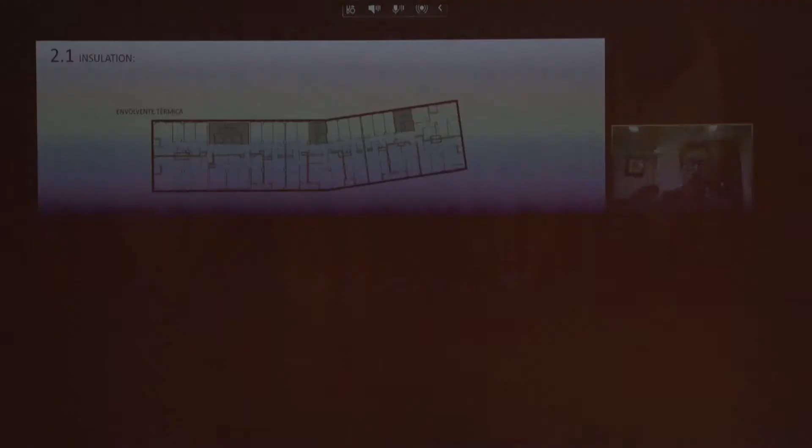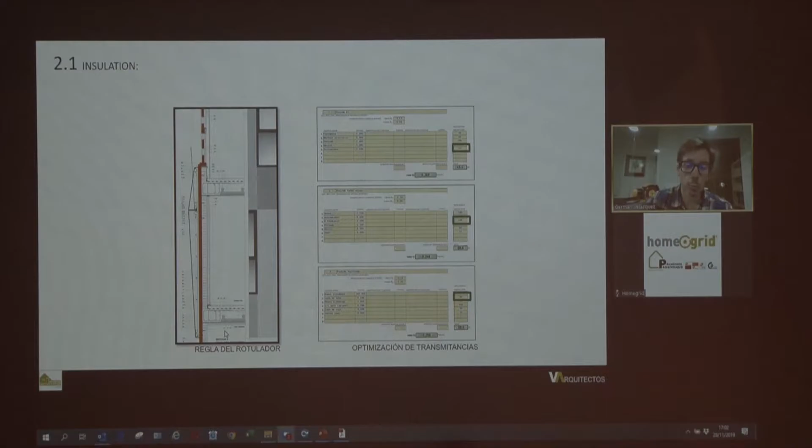The thermal envelope is, of course, outside all of the building. Inside this thermal envelope are non-heated spaces. We have to use lateral thermal continuity so we can have a continuous line of insulation outside the building, in plan, in section, in every part of the building. On the right we can see some of the U-values for this building. These are not crazy values — we're using 0.22, 0.24, not really so low. A big building like this helps a lot, and of course the soft climate in Bilbao is also very important.

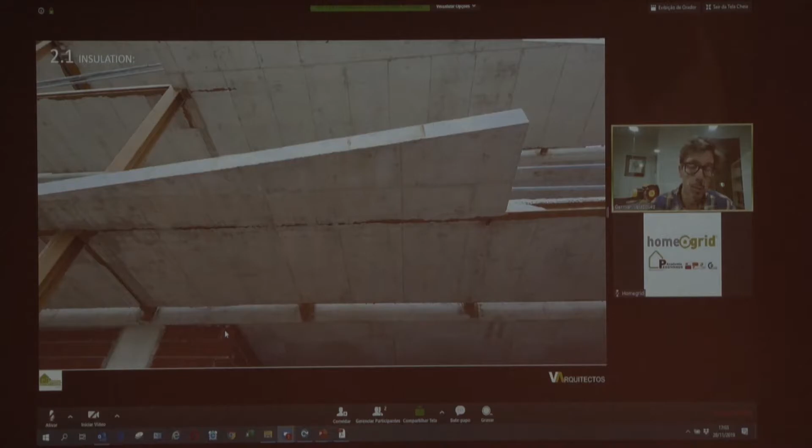Here we can put EPS to solve this thermal bridge. Instead of a linear thermal bridge, we're going to have punctual thermal bridges with a much lower value.

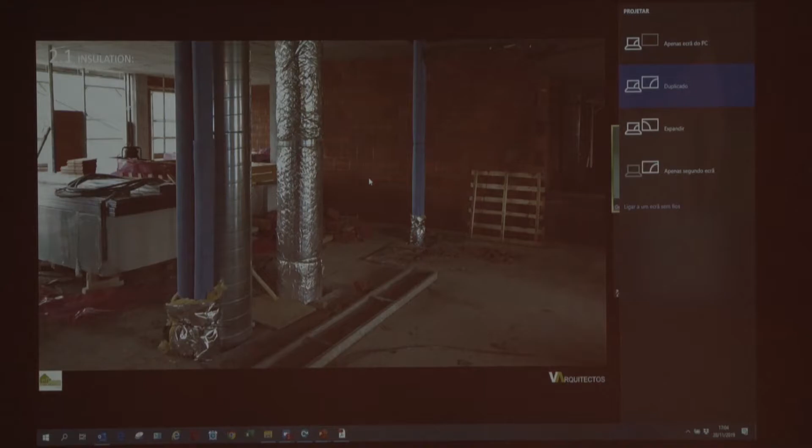Some things that, at least in Spain, we didn't usually insulate — what you see in blue is the acoustic protection for the drainage. We need to insulate these with at least 5 additional centimeters of insulation so we can reduce this thermal bridge. We won't make it disappear, but we'll bring it to a much lower value.

About the thermal bridges — this isn't a very difficult building in this aspect. We've got quite a few thermal bridges, but they repeat 1,000 to 2,000 times, so the most important thing is solving them properly, and after that simply repeating it.

Here we have the cross section of the facade and the roof. Usually in Spain we'd have a brick facade going up at the corner. If we do this, we get a thermal bridge of 0.18 watts, which is quite a high value.

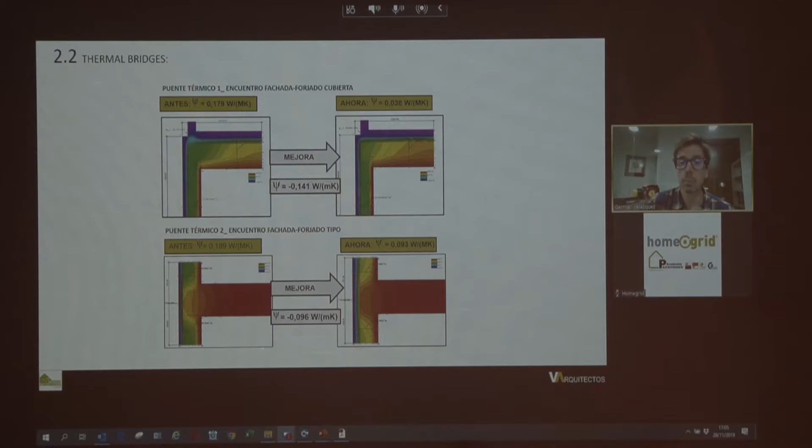If we simply use an aerated concrete block instead, we won't eliminate this thermal bridge, but we can reduce it quite a lot, as you can see in this image. This is a very simple, cheap solution. Maybe builders aren't really in love with this kind of solution because it's a bit tricky working with this material instead of bricks, but it's really an extremely easy and cheap solution.

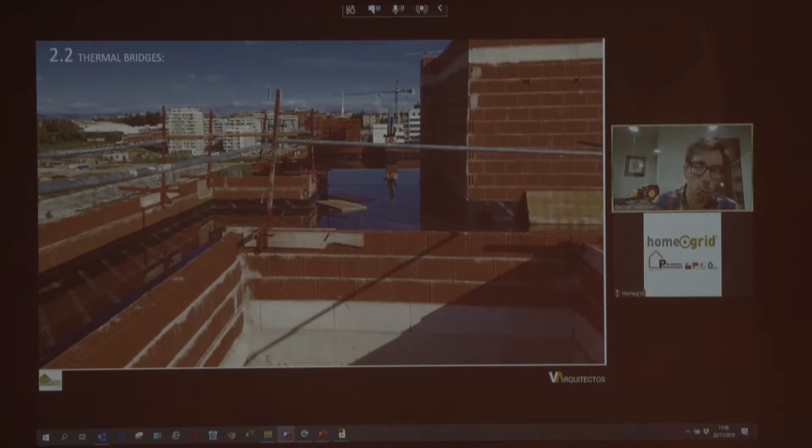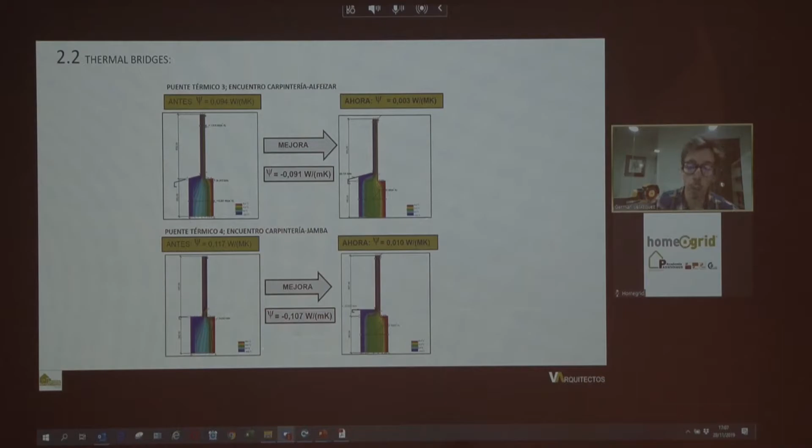So we have to go to the other option. Of course, we have to insulate the frame of the window. We have to get continuity between all the insulation lines. In this case, as you can see from the numbers, this thermal bridge almost disappears. Well, the truth is that it's something that's quite easy.

For making it in the side, especially in this cross section, we can see these little holes that are used for evacuating the water in case of rains and the window is open. So what we used were some special parts made with EPS and some impermeabilization that we used to put between the frame and the outside part of the insulation.

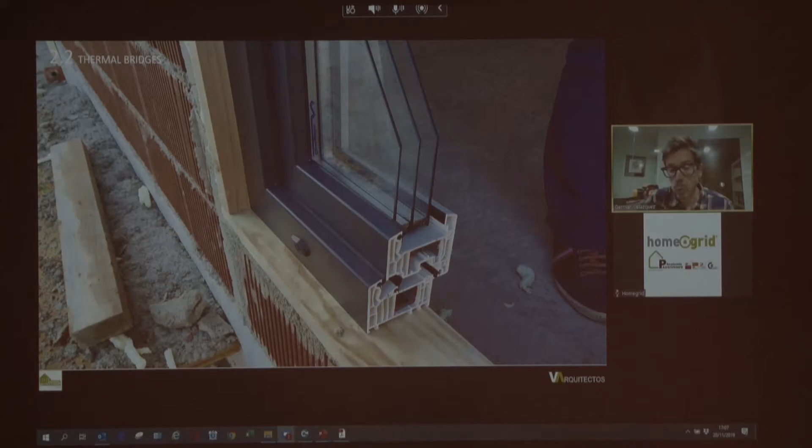With this solution, we are going to achieve a good thermal bridge, and we are not going to have any kind of problems with the water. This is more or less the final look of one of these windows. As you can see, the frame has around 12 or 13 centimeters, and it's going to get just from the outside about 2 centimeters.

About the windows, well, this is such an important thing, and especially some aluminum with double glazing windows with very strong thickness for the glass. And regarding noise, the traffic.

When we went for the passive house option, the window was quite similar, but the U value was half. As you can see here, the annual energy balance, well, it's a huge gap. We are talking about minus 100,000 to 29,000. So, well, we don't have much to say.

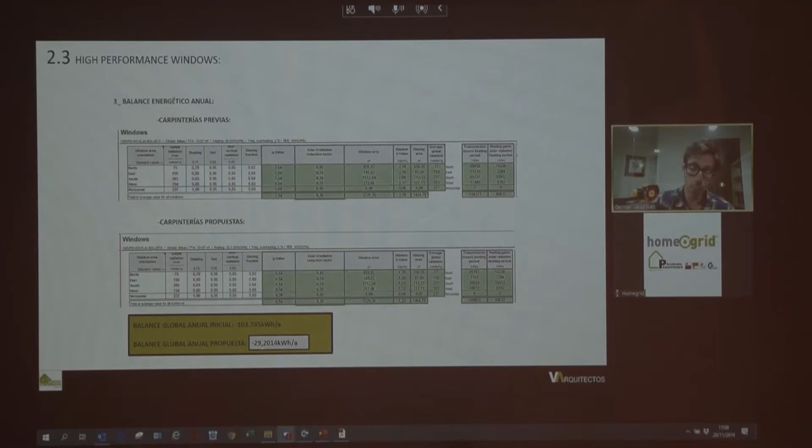Can we make passive house with double glazing? Yeah, of course, but it depends on the location of the climate and of course the orientation. Well, we have many different things to consider. In this case, it was a good investment going to the triple glazing, because if we hadn't, we should have gone to another part for improving the efficiency.

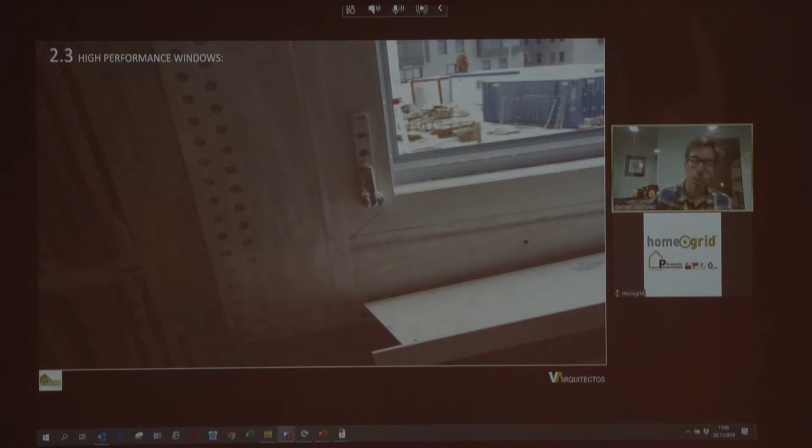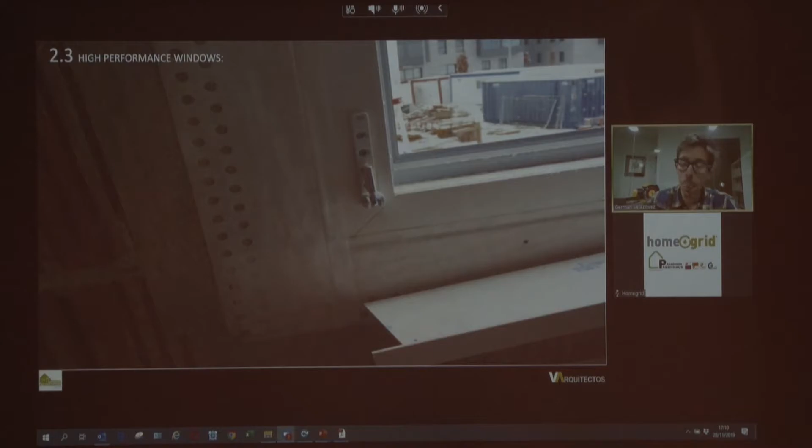Something very important about the windows is the frame, the glazing, the warm edge, but of course also the position, the placement of the windows. We are not going to achieve anything good with a great window if it's not installed properly or without addressing that thermal bridge that we saw before.

We are going to use air tightness bands, different bands for inside, for outside. It's so important using specific material, so we can be sure that we are not going to have interstitial condensation. We must be sure of the SD value, so the water vapor can go through the section without any kind of barrier.

Well, something that we found in the beginning was how are we going to protect the windows. In Spain, and I think it's the same in Portugal, we put the windows much later. Why? Because we don't want them to get worn. So if we have to put them very early, so we can do the air tightness test, the blower door and all these kinds of things, we are going to protect them.

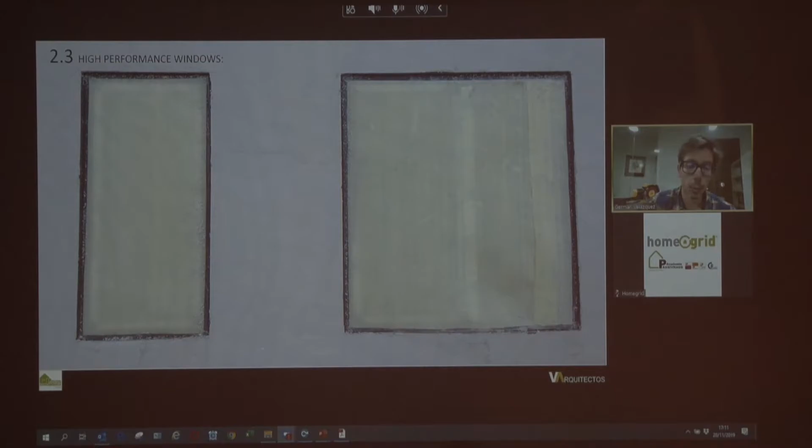Well, this is the first project that we made. Actually, what we are doing is this: put a first line of air tightness bands. After that, we can put the plaster. So we've almost finished the air tightness, with a double band of air tightness over the last one.

Well, this wasn't our first choice. Initially, we were a bit worried about the results of this situation, because the bands were going to be... but the thing is that if the plaster is dry and they put them properly, the results are really good.

Actually, we began in this kind of projects in apartments with values around 2.44, and now we are at values close to 0.2, 0.18. So with traditional construction and this kind of bands, we can achieve really very low air tightness.

Another important thing was protecting the windows from any possible entrance of water. The image on the left shows a traditional option in Spain, a band that wouldn't let water go all over the window. The problem is that it creates a quite significant thermal bridge. We're talking about 2 millimeters of aluminum, with 2 meters for each window. If we have 3,000 windows, this means a thermal bridge with a length of 6 kilometers. This is a huge thermal bridge.

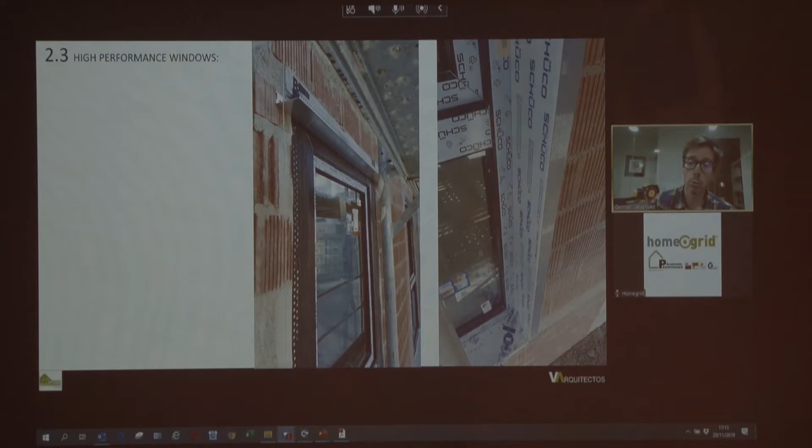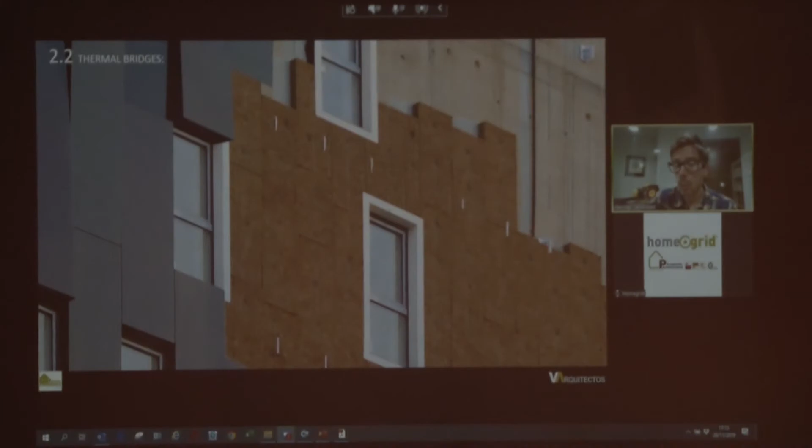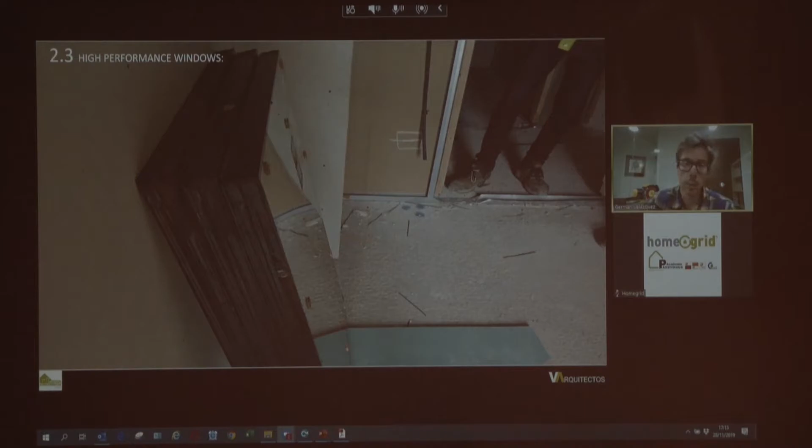The option on the right is a PVC frame that the window builder proposed, and it's really a great solution because it's just 9 millimeters thick, but it has an alveolar composition so it has a quite good U value. With this solution you're not going to have any water inside the window, and the thermal bridge is almost non-existent. The thickness of the windows is huge - these glazings are close to 52, 53 millimeters.

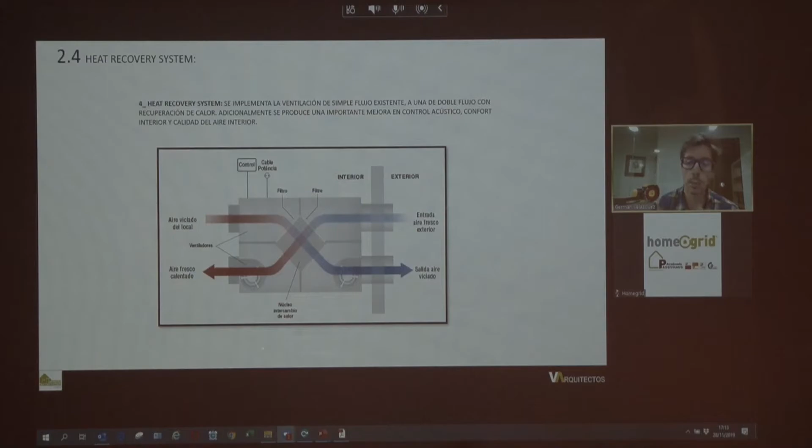After doing all these things, we have to work on the airtightness and the heat recovery system. We have many options, but what we're proposing in all these cases is individual heat recovery systems. Why? Because we need different situations for all these apartments.

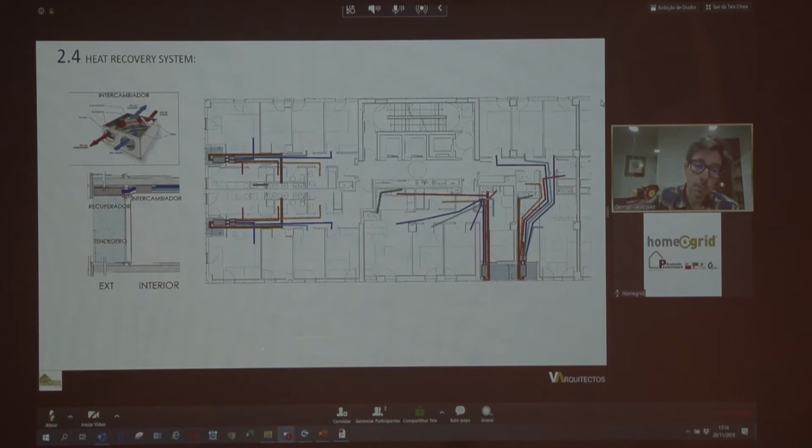It could happen because of this geometry, and this house should need a bypass and free cooling during the night, giving independence to all the users. Since we're also making the airtightness for each apartment, it seems quite logical this way. As you can see, we have the heat recovery systems outside in the balconies.

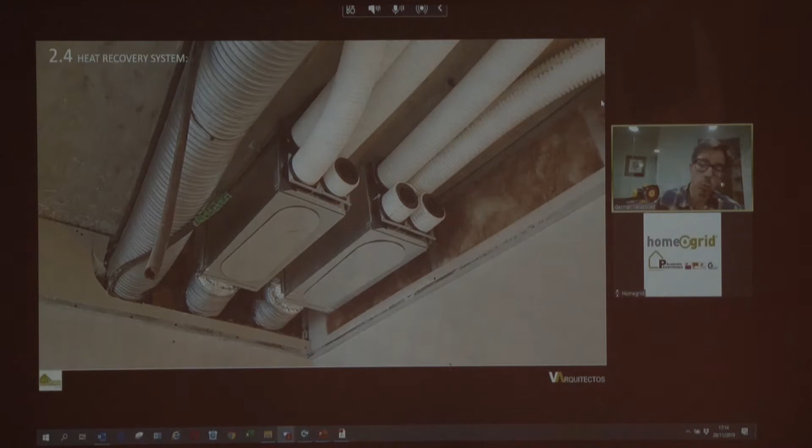After that, we've got all the tubes that go for the impulsion and extraction. It's a quite simple installation. And finally we are seeing that doing things with a bit of care gets extremely good results.

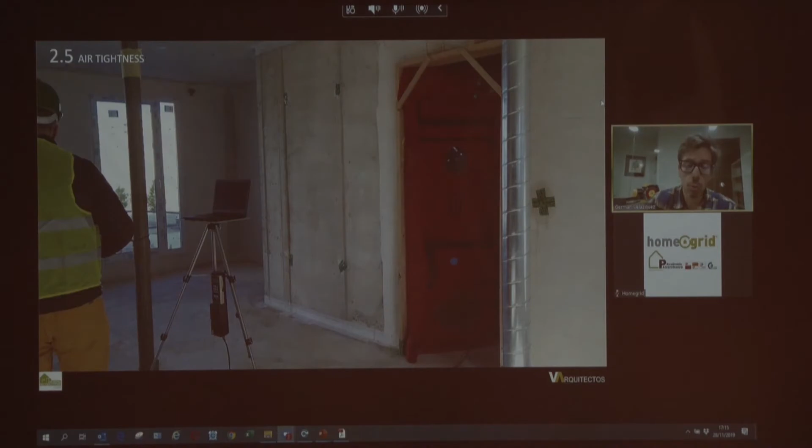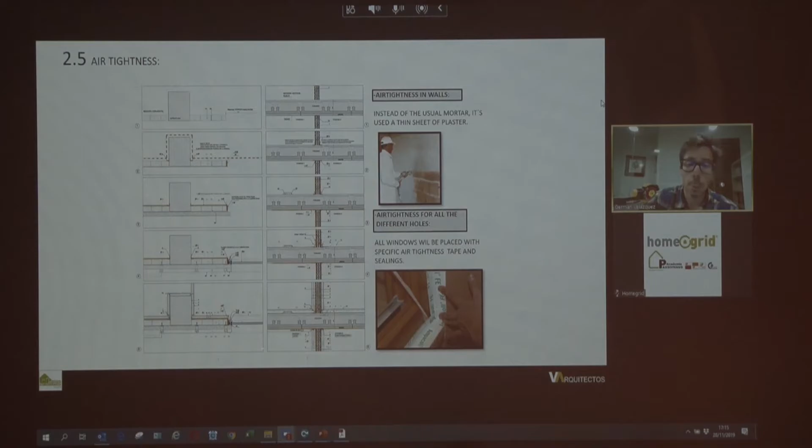We made lots of different drawings for the different phases that we thought were going to be important for the building. Actually, all these drawings are old - they could be 5, 6 years old - but our solutions now are much simpler, much easier to make on site, and of course cheaper.

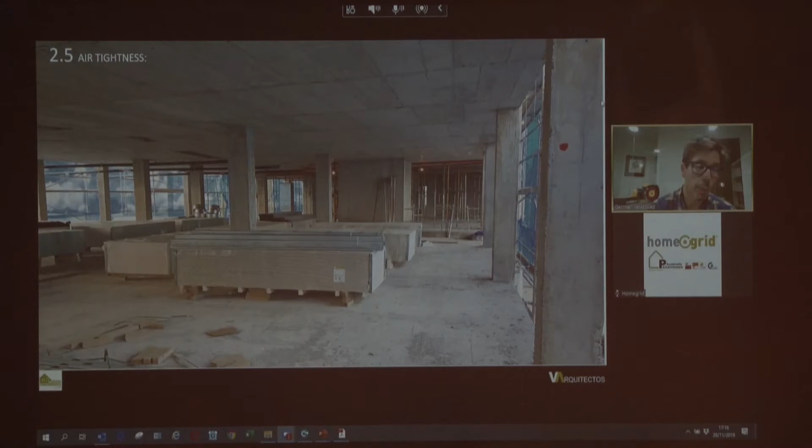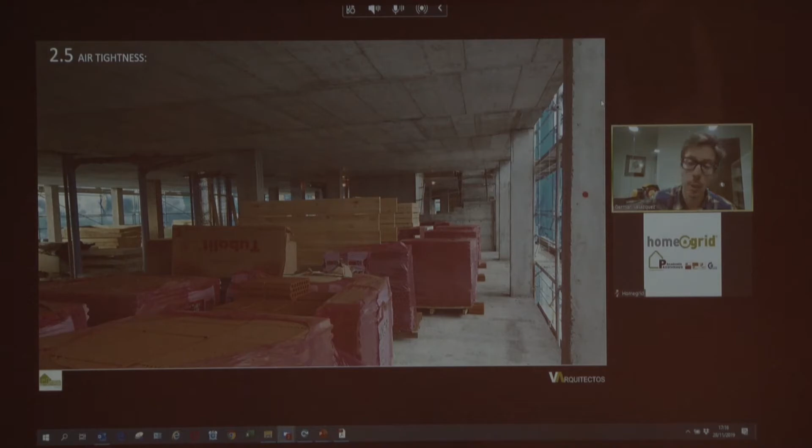Another important thing is that we are building passive house in the typical way we were building before. I mean, we are using concrete, plasterboards, brick, wood. We are not using specific or strange materials - we are using the same materials that we would use if it was not passive house, apart from the specific things like the heat recovery system or the airtightness stuff.

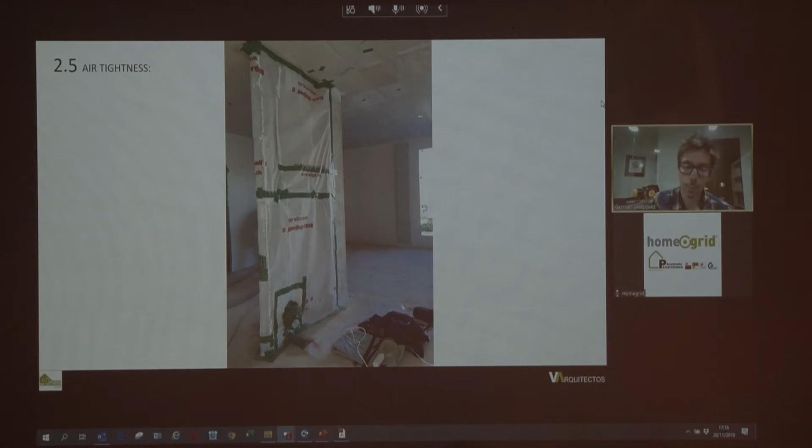Well, don't laugh please - this was one of our first trials for one service riser. The guy who worked here spent close to 1 day putting all this stuff, all these bands. It was really a huge amount of work, and the result was not really good. It worked - we achieved being below 0.6 - but it was really very hard work and didn't seem a very durable solution. So we went to continue the brick inside the apartment.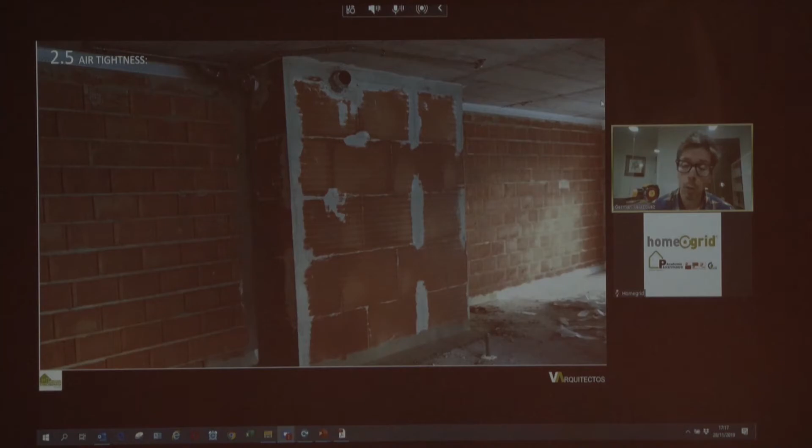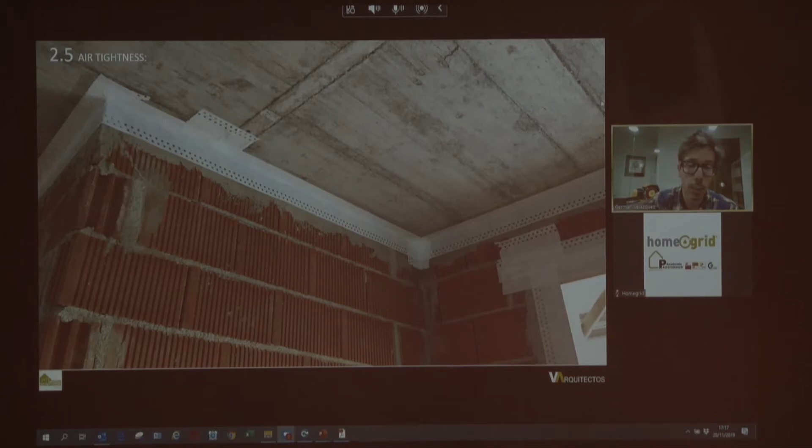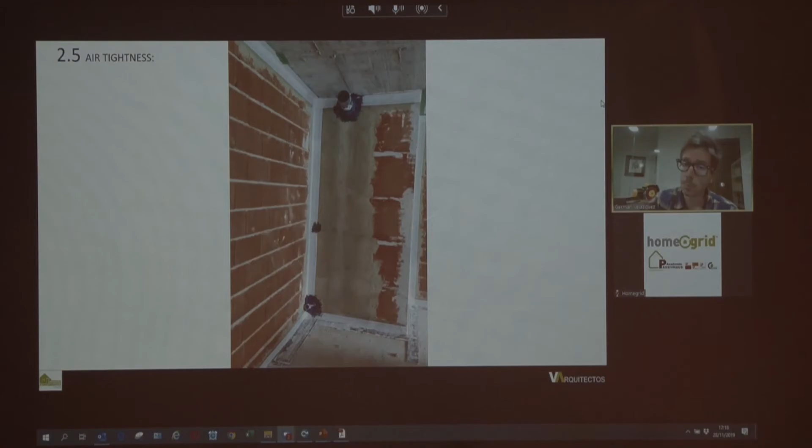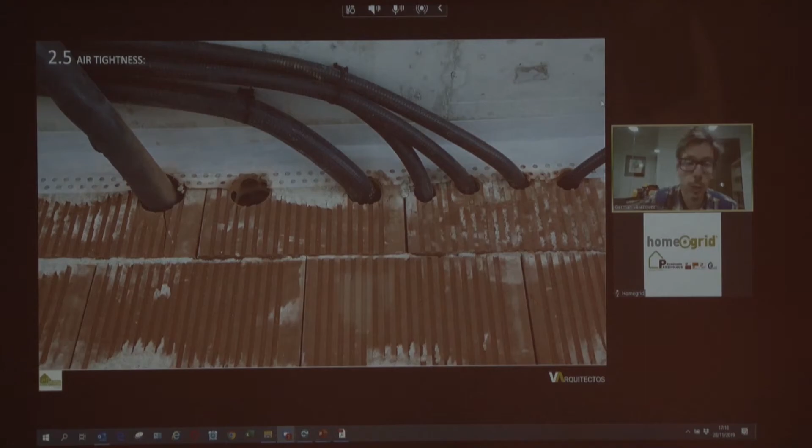The entrance into the house, in one of the apartments here, where we have on the left the water, then the communications, electricity. Before, in Spain, we usually made a big hole and put all these tubes inside. Actually, this is the way we have to make it now, so we can give airtightness to all of these tubes.

We tried an airtightness sheet, but actually it was difficult to work with, and the people here were not used to it, so we kept using the plaster.

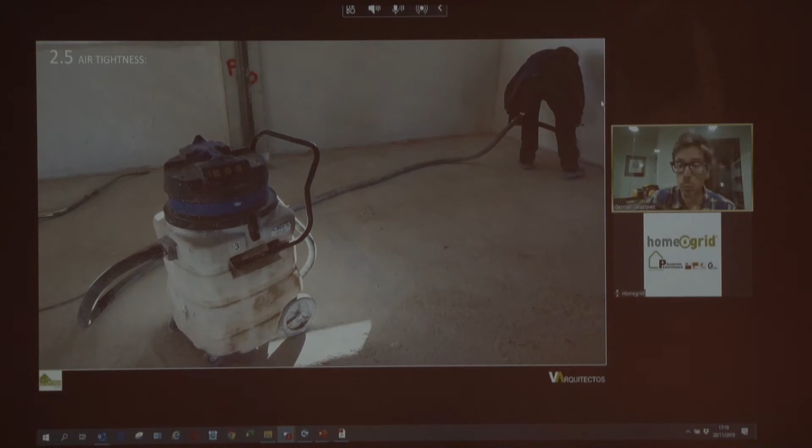This is what I meant by having a very clean work site. After that, of course, we have little tricks for making the plasterboard stronger without destroying the airtightness. There are some commercial solutions which are good, but I don't think we get better results with this than with the solutions we spoke about before, and our solutions are cheaper.

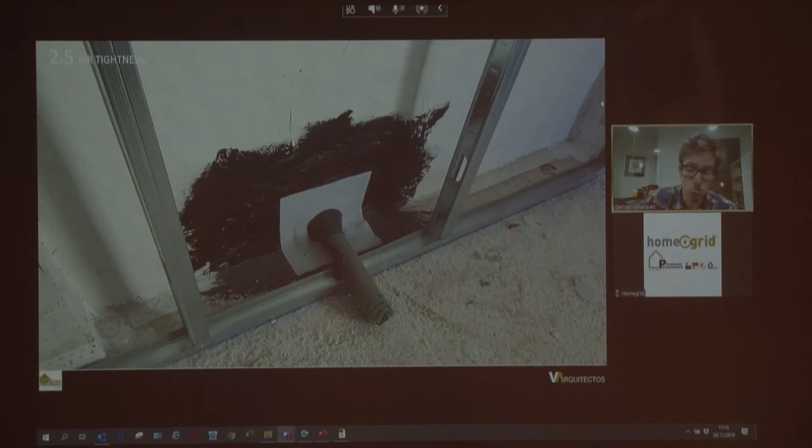Maybe if we are going to make one project for a single family house, these are good solutions. But if we are talking about housing, big housing developments, I would go to other kinds of solutions. Well, this is finally the certificate that we got in March 2018.

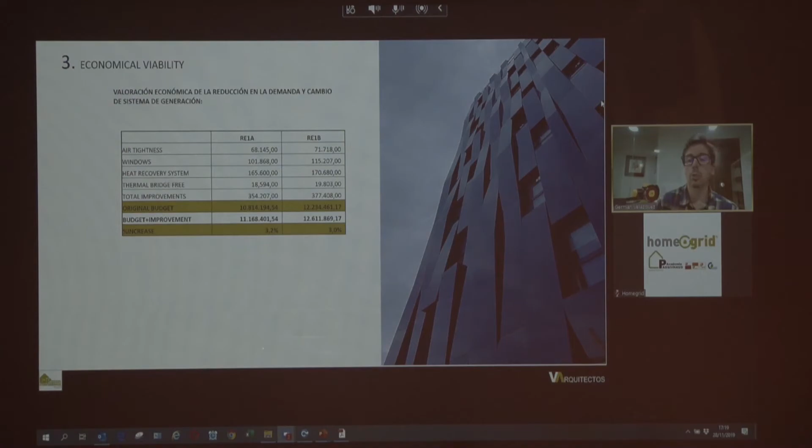These are, in gross mode, the overcost we had in this project. As you can see, it's close to 3%. And this is the reduction of the heating demand. If we assume about 10 cents of euro per kilowatt-hour, for the 361 housings, we would be reducing about 125,000 euros every year. So this means that in 5-6 years...

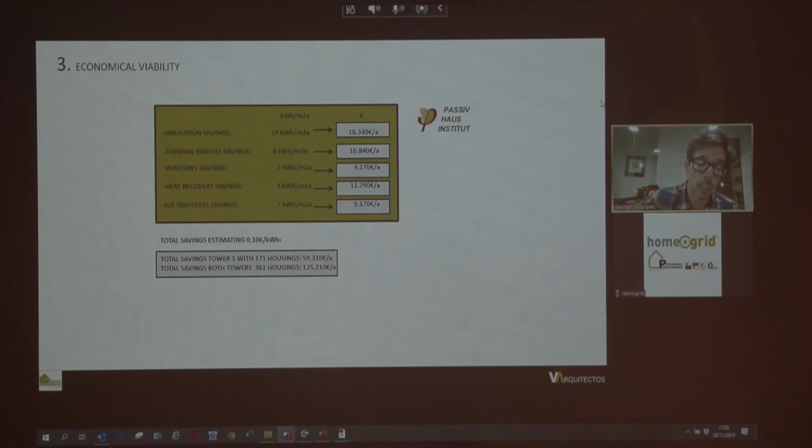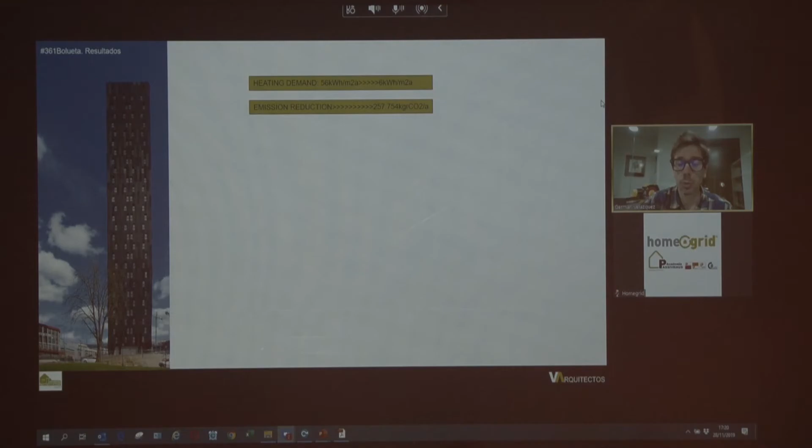This is important, of course, but probably much more important is this: a huge amount of tons of CO2 that we are not going to throw into the atmosphere. This is the same as if every year we could plant five football camps with trees, or take out of the city all these cars.

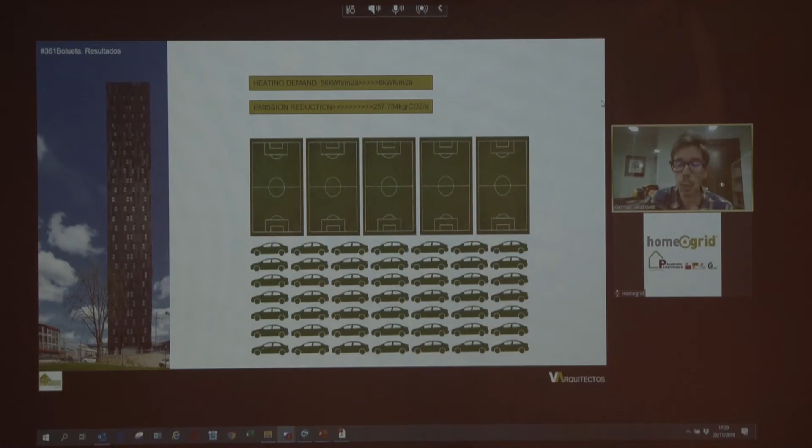Bolueta has been recognized in Spain with the Green Solution Awards, and also National Green Solution Awards with two additional prizes. It's been published in several architectural magazines in Spain, England, Austria, Serbia, and Germany.

Well, this is another project. This is the Congress Center Europa. I'd like to share with you just a few fast examples—I'm finishing very soon. This was a work we made together with Michel Bassouf. It was an extremely difficult project because one part was a retrofit, another was

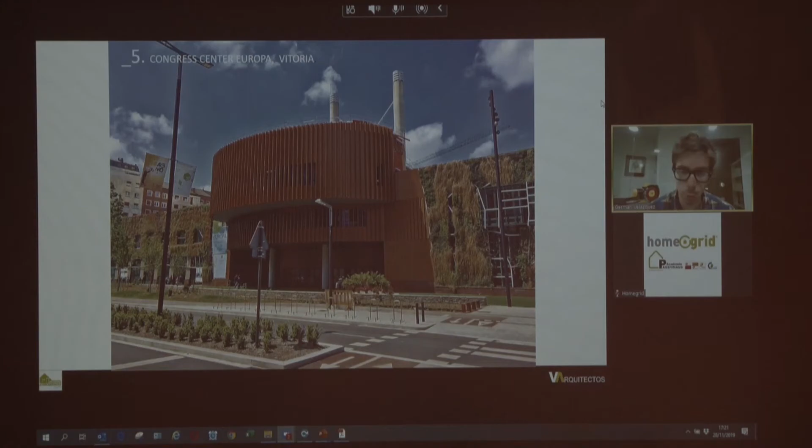simply an amplification. It had a big auditorium. We were not the architects, we were just the assistants, and nobody wanted to listen to us. Well, it was a success because we finished it and it's working fine, but it was really an extremely difficult project.

This is the 29 Soto. This is the first passive house residential building in Spain.

Well, this is a project that had quite a big repercussion in Spain. It appeared in the newspapers, on TV, and it was awarded by Asprima as the best residential project with efficiency criteria in Spain, which was quite a big success for us because we are a small team.

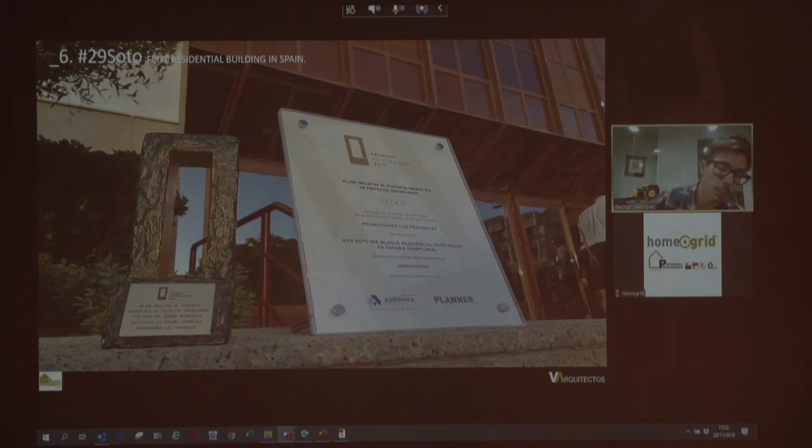The owner is a small promoter. It's a very small building, so this recognition, this acknowledgement, was really great for us. This project has also appeared in several magazines and so on.

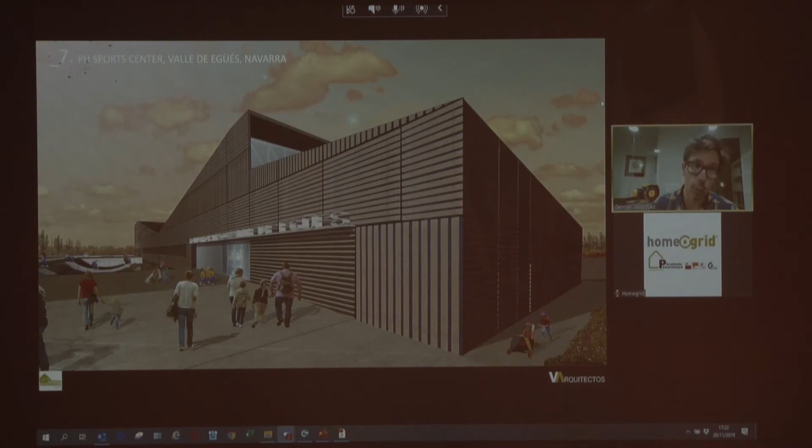This is a passive house project for a sports center that hopefully we will start soon.

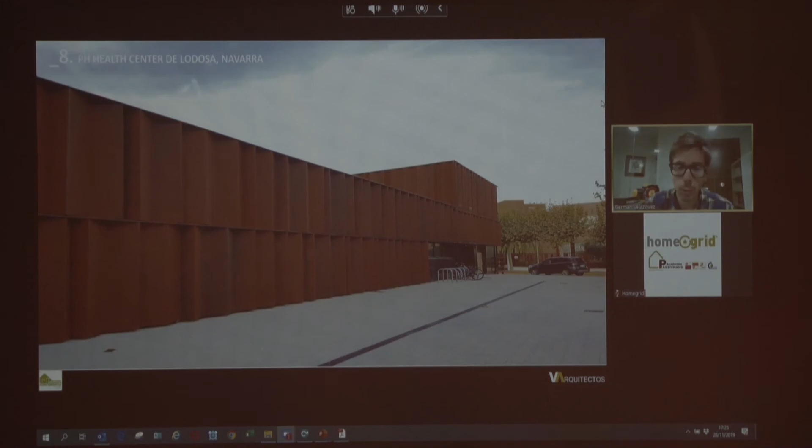This is a health center which is certified, and we finished it really short ago. The passive certification is about 2 weeks old, so it's really starting to run this second phase. We are very happy with this project. It's a very different project from residential.

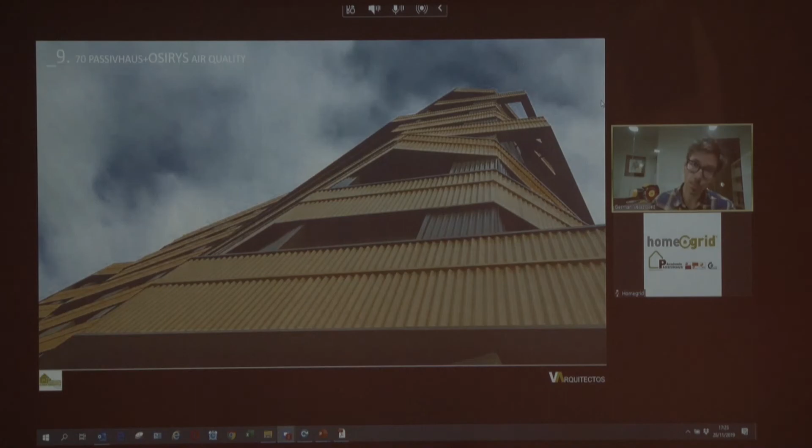This is an interesting project, even if it's not Passive House certified. It had Passive House criteria, but finally we had to leave the tightness in the way because of the budget. But it's inside the OSIRYS project, which is about the air quality inside buildings. It's a European consortium in which we are going to work with some experimental materials that are going to absorb

or eliminate the VOCs, the formaldehydes, and the toxic gases that are produced during the construction of the building. Well, it's a really great experience, but of course it's simply a European project. The truth is that we should now bring some of these solutions to standard buildings.

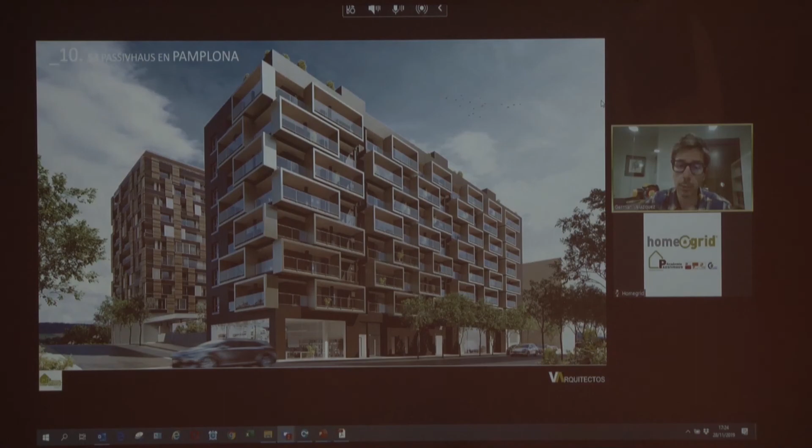It would be great. We are working on this building. We finished the structure and we are beginning with the facades. It's going to be a Passive House certified building. In this building, we have improved some of the solutions. These are the parts we are going to use for the thermal bridge.

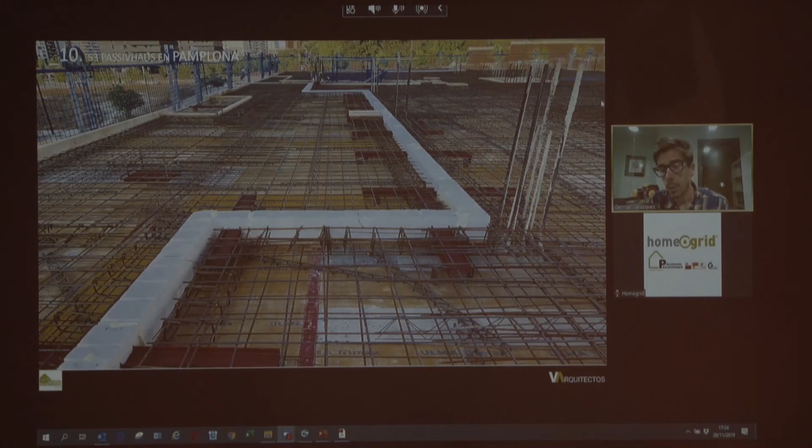This is the thermal envelope. To the left, we have the balconies, which are huge, and to the right, the heated surface inside the apartments.

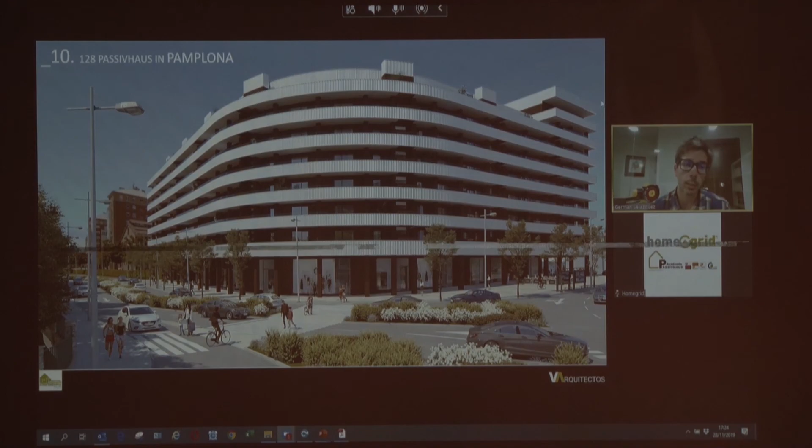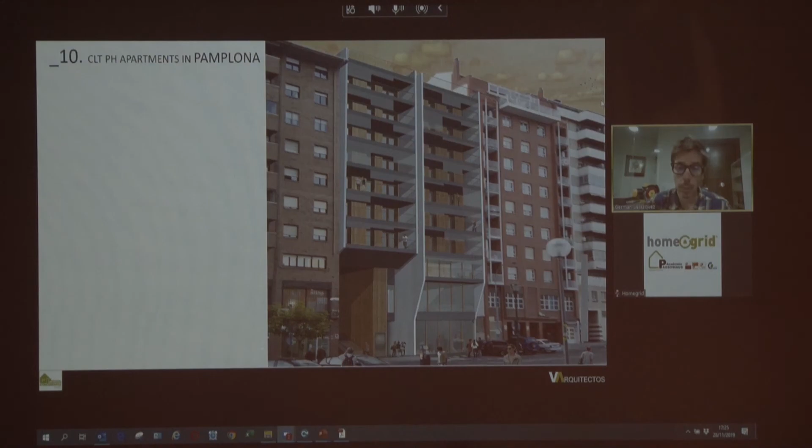This is another project we just started last week, for 128 Passive House units here in Pamplona also. This is a project for some apartments in Pamplona, which are going to be Passive House and made with wood. They have around 10 levels and are going to be probably the tallest CLT building in Spain. This is a project we're going to start very soon also, for some laboratories.

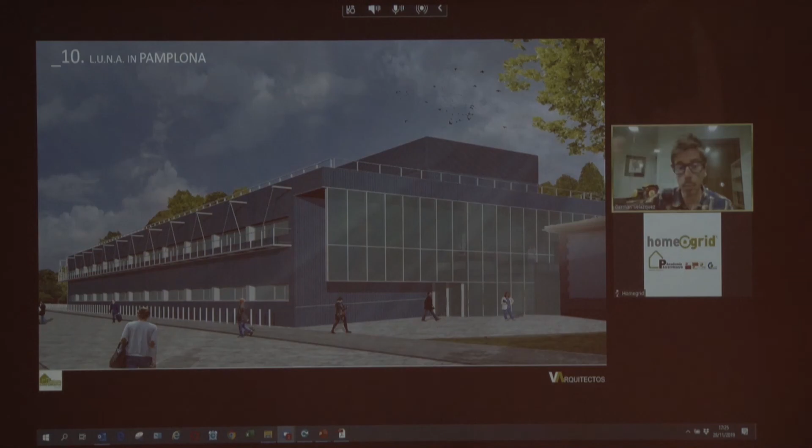Well, we've got lots of reasons for making Passive House, as I said before. If you are not concerned, if you don't care about the health of our planet, you can do it for your own health. We can do it for being more comfortable in your house, and of course you can make it just for money. There are lots of reasons, and all of them are good. But simply, if you can make it better, we don't have to make it any other way.